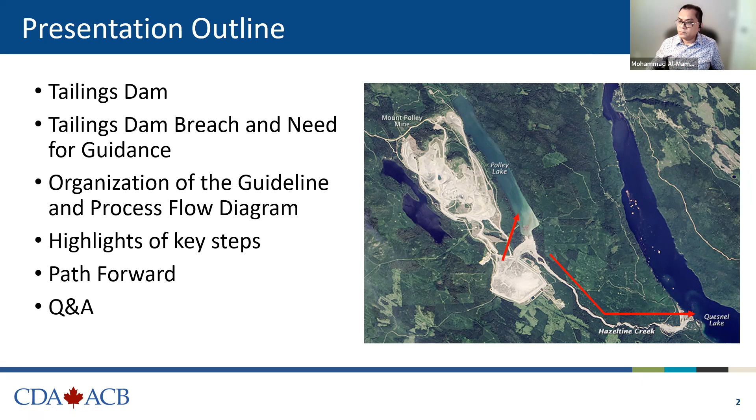So what is a tailings dam? I think most of you are probably familiar with that, but for those who are not quite familiar with this terminology: when you say tailings dam, we mean a containment or barrier structure usually constructed in mining operations to store their mining byproduct, which is tailings.

Basically, we can see the two materials deposited behind this tailings dam are the tailings and the supernatant pond. As you can see on the right side of the slide, there are different ways of constructing these dams, popularly known as the upstream method, centerline method, and downstream method, depending on how they have been constructed. On the side, I'm showing an image of the Fundão tailings dam in Brazil, which I'll reference in some upcoming slides.

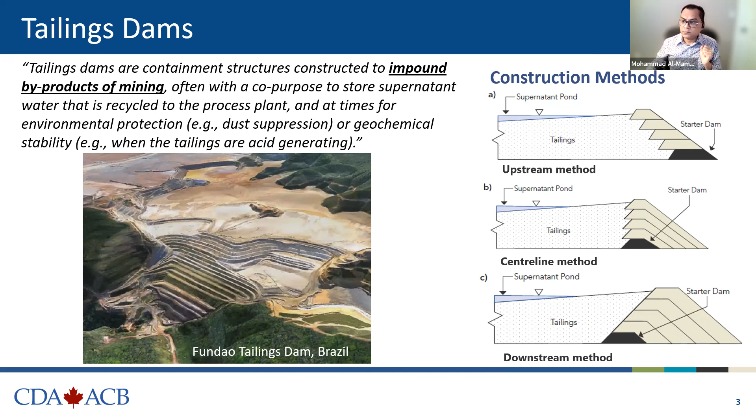So what is the dam breach, and why does tailings dam breach need more attention with respect to the conventional dam breach that we have been familiar with, the water dam.

Once it breaches, you will definitely see the material come out. So as you can see in the side-by-side comparison, tailings dam breach and post-breach characteristics are not similar to the water dam breach, so it does need particular attention.

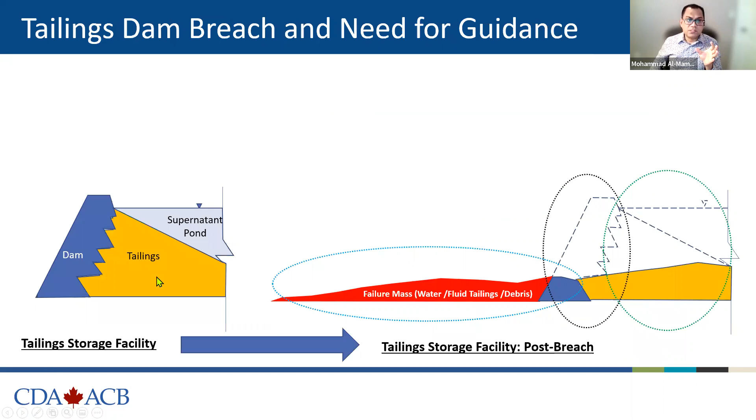So I want to elaborate a little bit more on that. This is a typical tailings storage facility, just another schematic. You have the dam, you have the tailings, and you have the supernatant pond.

Now, in terms of understanding how the tailings dam breach works, I drew these schematics with three circles, and that's how I see this whole thing in terms of doing a dam breach study. The green oval is basically the post-breach, where the tailings was all being retained. The second, the black circle, is the dam—how the breach occurred. And the third part is once the breach occurs, how the material is going to flow downstream.

So unlike a water dam, you will need to understand first the geotechnical characteristics of these tailings, and then the hydrotechnical characteristics in terms of when they are going to flow.

It's a complex process that goes beyond one discipline of engineering. It needs to bring in knowledge from multiple disciplines involved in tailings dam design, construction, and operation. That's the breakdown of how complex this breach could be.

And that's why we need to worry about tailings dam breach, particularly understanding the after-effects, because this is very important for dam consequence classification, emergency planning, and mitigation planning. It's important that we come up with a realistic, acceptable, and reasonable inundation map, so that subsequent work like consequence classification, emergency planning, or mitigation planning can be based on those plans.

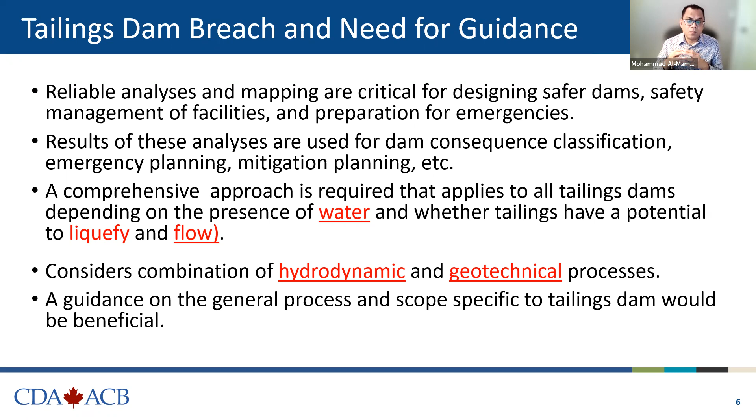With all this understanding, we consider that a process should be developed that considers both hydrodynamic and geotechnical processes. With all these, we started to feel we needed to develop some guidance document. So a little bit of history with respect to how CDA got involved.

Before 2014, there wasn't really much concerted effort to come up with any guidance document. I started my practice in the early 2000s, and at that time we were using water dam based modeling. We started to see the gap and the challenges we were facing, in that those approaches were not adequately capturing the tailings dam breach phenomena.

So in 2014 and 2015, we actually did a series of workshops. The first workshop in 2014 was a state of practice workshop. We invited people from Canada, North America, and also internationally to share their knowledge - how they are doing things, what kind of approaches they're using, what kind of challenges they're having. That was a day and a half workshop, very successful, attended by a lot of interested parties.

That was followed by another workshop where we wanted to see how we can coordinate our effort. Following 2015, the Canadian Dam Association Mining Dam Committee mandated a working group to develop a guideline document. That working group worked from 2016 and is still working, I think. By 2020, we had the final draft. In between 2017 and 2019, we had a couple of workshops where we gathered input from interested parties. Finally, late last year, the bulletin came to light. So this is how it looks, the cover, and it's now available on the CDA website and available for purchase.

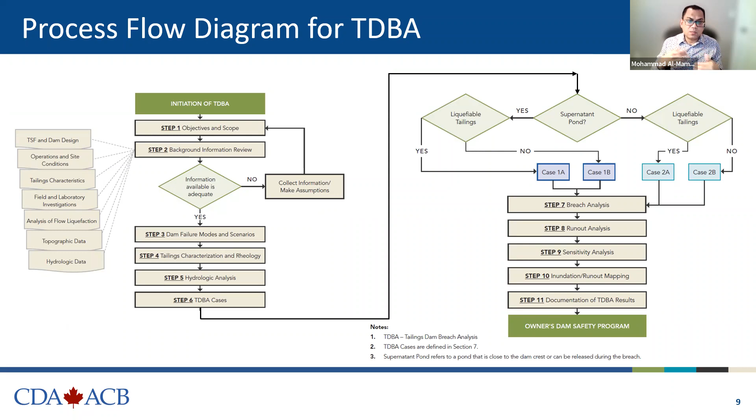So beyond that, I think I will move into some of my slides. I think I'm going to talk about that.

So in terms of the study scope, a little bit more on that. Now, we know that, as I said, sometimes you may not need a very detailed study in terms of the breach analysis and inundation mapping or that kind of stuff, but you just need to understand the preliminary picture of what's going to happen if the dam fails.

So you may be able to do a desktop study, but you can still follow that framework up to the level where you think you don't need to go into further details. And then, of course, you can do the detailed study.

The other relevant question we get from time to time is the validity period of the TDBA, right? So we know that the tailings facility usually has its own life cycle. If it transitions from one stage, let's say construction, operation, to the closure and post-closure, there will be material change on the facility.

So you need to update your inundation study. And the other time you have to do it is if there are major changes, right? If there is a major change in the downstream, there is a new building or new settlement, then you need to revisit your existing inundation study, or there are changes to the design of the facility.

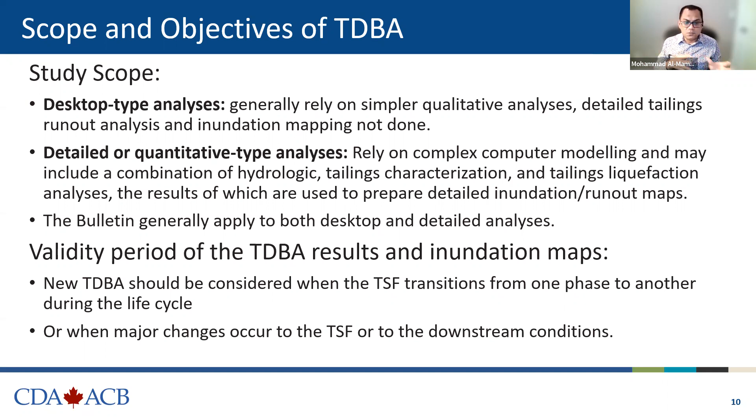You raise it by another 10 meters that wasn't anticipated. So it's just common sense, right? We are trying to use this study to capture the downstream consequence, or the downstream impact. So if something happens either downstream or upstream, then you need to revisit your study and capture that.

Now, the failure modes and dam failure scenarios. This is very important for the tailings dam, and there have been multiple guidelines and best practice documents published recently. So there is ongoing discussion around clarity of what should be explored in the tailings failure modes, or critical failure mode, and so on and so forth.

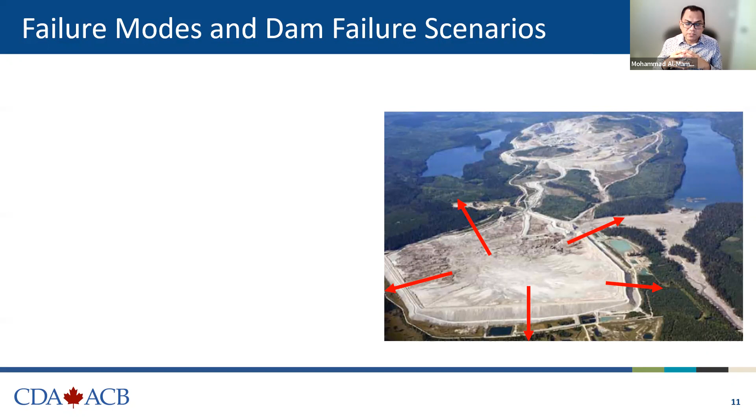So what's important to understand from the dam breach perspective is that you cannot just pick and choose one failure location and failure mode and go from there by presumption, right? So what we advocate in this bulletin is that you have to have a physically sensible and realistic failure scenario and failure modes that you are going to use, not a failure mode that you think has very remote possibility of occurring.

So we use the words critical and credible failure mechanism, but don't get too hung up on the word credible failure mechanism, because we know there are different thoughts about the actual definition. But without getting into that, what we are saying is it has to be physically sensible and realistic, so that the prevailing failure mechanism or the failure modes, collapse or overtopping, the way the dam usually fails, can be related.

Now, all relevant TSF stages, including construction, operation, and closure. I think it just ties with what I said, that if you are dealing with a facility going through different phases, then you need to put that into perspective as well.

And the other part of this is that this is just another snapshot of the Mount Polley facility. It's in British Columbia. So you can see that it's a ring dike. It's an external tailings facility.

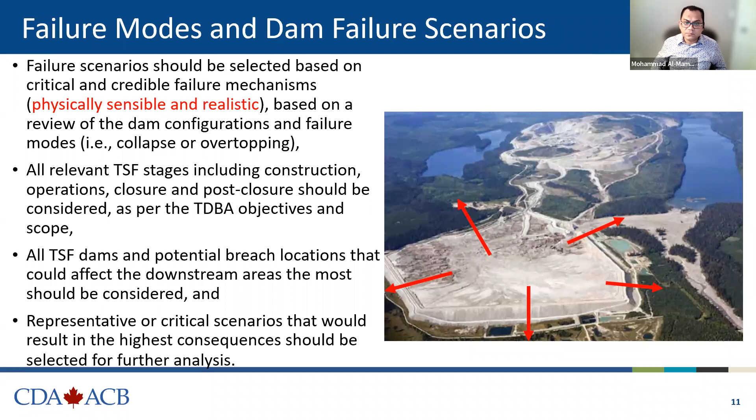Before I move further, I wanted to add a bit about tailings characteristics, the composition and characteristics to evaluate whether tailings is susceptible to flow liquefaction. We talked about CPT and other in situ and laboratory testing, but the main point is that you have to understand how your tailings is going to behave if the tailings dam is no longer there. Is it going to stay there as a solid mass, or is it going to run out as a fluid material?

So how do you do that? There are ways in the geotechnical investigation and understanding process. I just put in a CPT trace. That's one way, it gives you the particle profile, and you can develop your general understanding of the tailings across the facility.

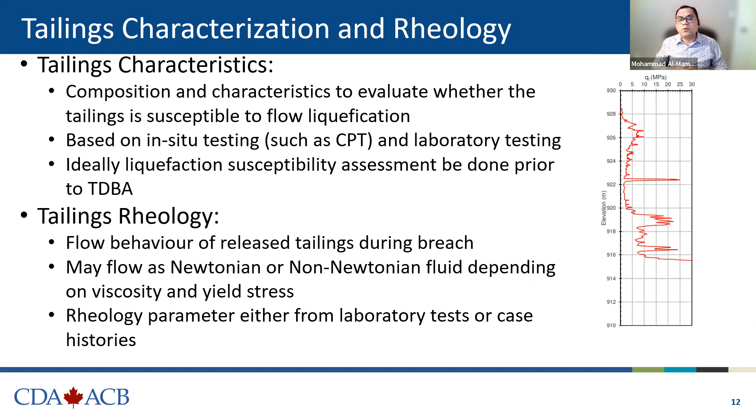The other term I'm throwing here is tailings rheology, because as I've shown in my previous sketches, there are three bubbles: your facility, your dam, and your downstream. When the tailings started to flow downstream, how it's going to flow, the flow behavior will depend on the rheology of the tailings. So that's some information we also need available for this study.

If you remember the flow chart we had, this is one of the central parts of the process. What we are saying is that if you have a tailings facility, just look at it the way it is right now, and say whether it is holding water, or it can hold water in the event of a big rainfall. It's not very difficult, you don't really need to do a lot of study. If you have a general topography and look at it visually, you can get your head around that. So the big point is that water is close to the dam, right?

If you have a large tailings facility and it is holding some water far away from the dam, then it may not be that critical. So when we say supernatant pond, we are referring to something similar to what you've shown in the sketch, close to the dam and available to come out in case of a breach. So do you have that? That's your first logical question to ask.

The second piece is a little bit loaded. Now you need to say, okay, is my tailings liquefiable? It's not an easy question to answer, especially for facilities that haven't gone through a lot of rigorous investigation. But without knowing that, or at least having some understanding of it, you won't be able to do a proper inundation study, or whichever type of study you do, it's not going to be complete without understanding if that material is going to come out or not.

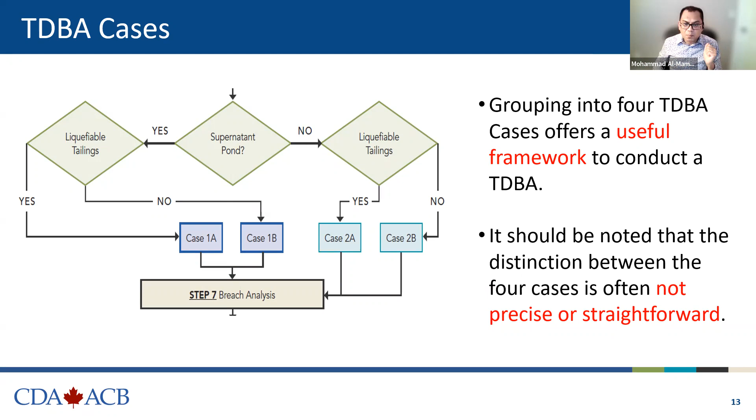Bear in mind that this is just giving you a framework to articulate your thought process, before you jump into very detailed analysis. For a given dam, you may have to use your judgment and understanding, and explore a bit more to use this framework. It's not going to be like every dam is covered, it's not precise or straightforward, but at least it is something that will give you a starting point.

Now, another representation of the same process, we fondly call our 2x2 matrix. It actually has a 2x2 form. So take this: is my tailings liquefiable? Is there a supernatant pond? Pay attention to the words we mentioned. We didn't just say supernatant pond - we said supernatant pond present or pond release possible during breach. That's the important part. Is release possible during the breach? If it does, then that's what we meant. And then whether your tailings is liquefiable, decide.

So you can see that case 1A, you have liquefiable tailings with supernatant pond, and then the same scenario without pond in case 2A to B.

Now, the other point I wanted to emphasize is that those of you familiar with tailings are probably familiar with the term liquefaction. Here we are particularly interested in flow liquefaction that could be induced by any trigger - static, cyclic, or seismic, including lateral unloading. So what we mean is that if you have liquefaction, not necessarily liquefiable tailings fitting into 1A, what you need to understand and confirm is this flow liquefaction. In other words, if this containment, this trapezoid holding the tailings, for some reason if a portion of this is gone, would this material come out as a flowable material?

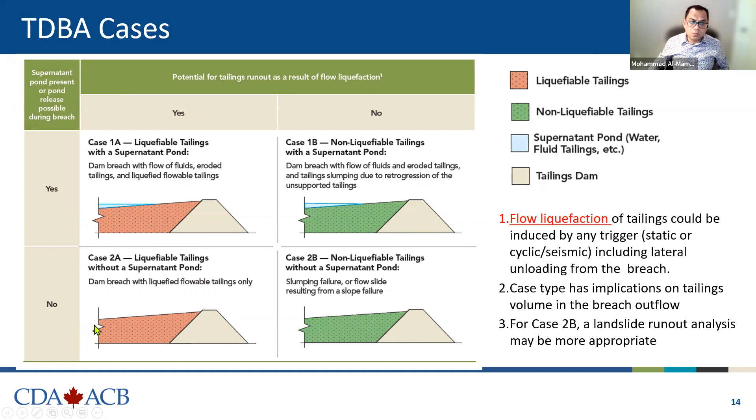That's kind of the main point. If that happens, then I think you need to consider that as case 1A or 2A. So as I said, these things are not quite straightforward. There will be some judgment and understanding that needs to be considered.

So what are those? For example, if you have a facility that has been closed and there is no water, in a sunny day failure or normal case, you don't have any extra water. But if that same thing fails during a hydrologic flooding event, then it will become like a water holding facility - your 2A may become 1A. Likewise, if you have non-liquefiable tailings and no water, but there's a space within the crest of the facility that can hold water, and that causes failure, then you have to consider it as case 1B, just as an example.

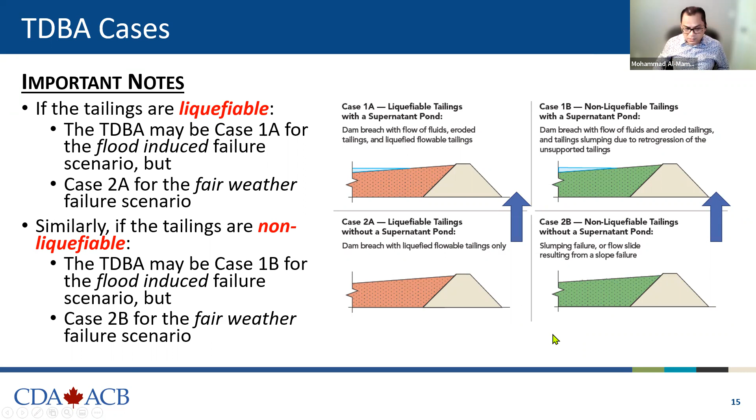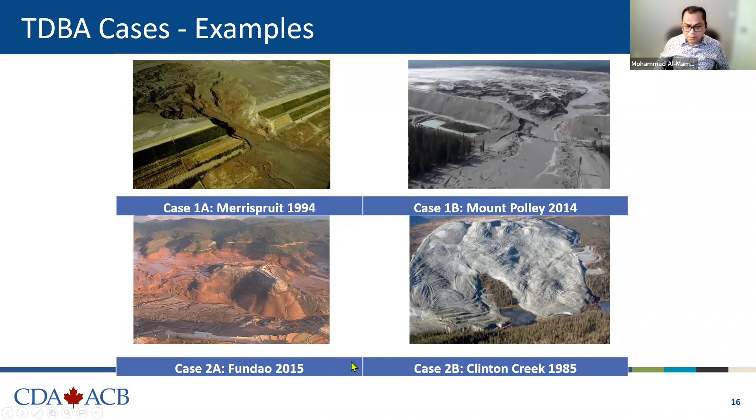So then we also looked into some case histories - did we test this 2x2 matrix or framework? Here's an example. We looked into case histories, like some recent failures and also some historic failures. You can see there are examples. I'm not going to go into too much detail about that right now.

So then now the hard part comes. Once you go over your facility, understand your tailings, come up with your 2x2 matrix and your mechanism, now you need to do the actual breach analysis and modeling and so on. So you have to understand three parts - these three bubbles. The reason I'm saying overlapping is they're not standalone because they are all dependent on each other.

So breach analysis is basically understanding the physical process of tailings breach for a given facility and case, and then calculating how much volume is expected to come out, and understanding how the dam itself is going to breach in that process. Once those two happen, then you've got a big mass. The third part is that you model the breach extent downstream. So those are basically the three parts.

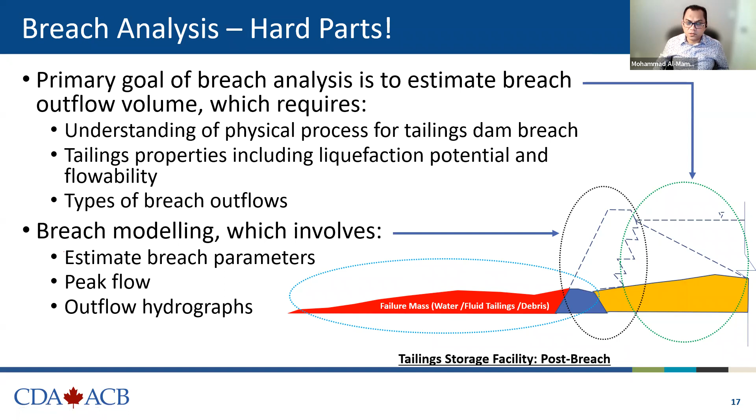There is lots of detail in terms of these three steps. And as I said, it's an evolving science. So we were cognizant of that when we developed this bulletin. But here I'm going to touch on some aspects of it - the intent is not to really go into the details of any of those.

So the physical process of tailings dam breach is how the breach will actually unfold. If you are in case 1A, 1B, you'll have erosional breaches because you have the supernatant pond - it will erode tailings when being released. That's one part of your flow. And then if you have a liquefiable material, that will come out too. So that's case 1A, 1B - a general understanding of the process of breaching.

But then if you have case 2A, which doesn't have water, it's just that if the dam fails, it's just the liquefiable tailings, if there is liquefiable material. But if you look into case 2B, there is no liquefiable material - that means it's not going to flow. There is no water, so there will only be slumping or a slide, because there is no water. So that gives you a sense of how the breach will unfold.

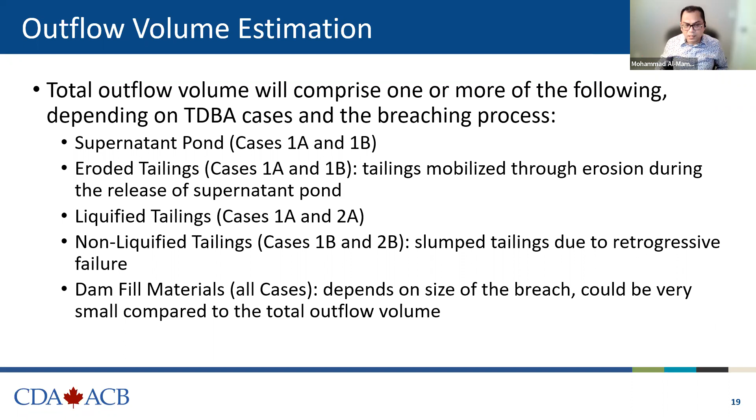And then depending on how wide and how big the dam is, your dam fill material will also come out. Now, if the dam is holding a lot of material, a big pond and everything, which you see in many tailings facilities, then this material will be very, very small compared to the total amount of the outflow volume. But give or take, these are the elements that you need to calculate and understand how much is going to happen.

So this is one example of how we think we should look into the outflow volume calculation for Case 1A, where you have a supernatant pond, and then you lost your dam, let's say, and then your material will start to unfold, and eventually it will be released, and then you will end up with a backscarp. And in terms of the plan view, if it is a ring dike, then you will be seeing a failure scar here, like what you have seen in the Merriespruit case.

So that's kind of the idea. And we talked about how you can use a simplified approach or a more detailed approach to calculate that.

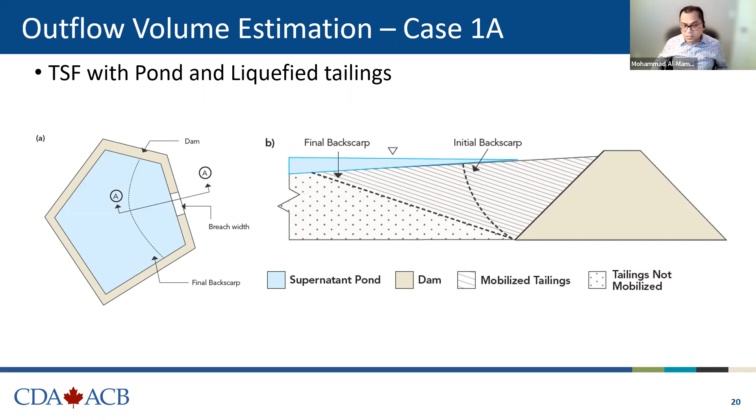So the second part is my second bubble, the black part, the breach formation. Now that's a challenging element in a sense that even the breach formation of a water dam with an earth embankment is also not completely understood. Some of my hydrotechnical friends may or may not agree to that, but I think that's one observation by the working group, because we know there is some established science on how to do the overtopping or piping type breach modeling, but they are not readily usable for the tailings dam.

For the erosional type failure, you can use them with some modification, but where you have a liquefaction trigger, it would be difficult. So there are some discussions around that, and it's an evolving science. So you will have to go above and beyond in some cases if you wanted to fully capture that, and then you have to see the relevance of this with respect to the overall study.

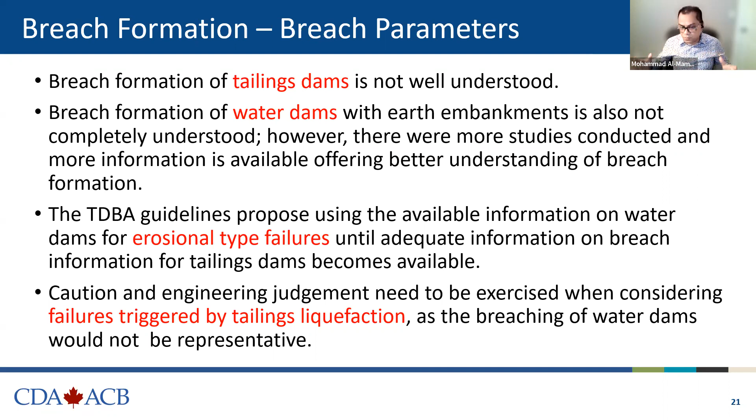And then the next step is the breach outflow. Now, there are more than one ways to capture that. I think what we adopted in the bulletin is the solid concentration, because what is going to come out, my third bubble, the downstream, is going to be a mixture of water and solid. So one easier way is to see actually how much solid content you have in this, because there's a lot of study done on that. So we can use some of that knowledge, and you can have a water flow, mud flow, and flow slide, and then you can have a slumping.

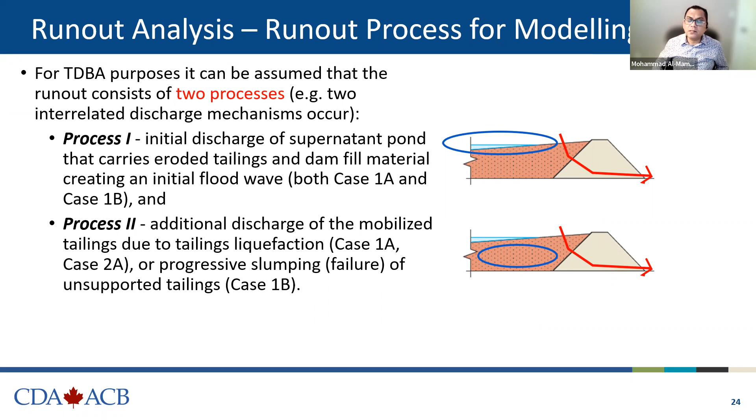So what we are suggesting is that you assume this as a two-process flow, and use that to do your runout. You may have to combine these processes and do your runout model, but it will depend on the facility, so things get a bit more complicated. There is no one way of doing that.

There's also some guidance around material in the flow runout process and flow type for each case, so you have an understanding of what material is in the flow, and how many processes you are expecting.

If it's case 1A, both processes occur, and in case 1B, both processes occur. But in case 2A, because you don't have available water to initiate the process, it's basically that you lose the dam and the material behind comes out—so it's process 2: a mud flow, flow slide, slumping failure, or flow slide.

You'll see we're using heavily loaded terms like Newtonian, non-Newtonian—these are more hydrotechnical terms characterizing the outflow, which will dictate what kind of modeling you'll be doing. There's some additional guidance on that in the bulletin, so I won't go into too much detail.

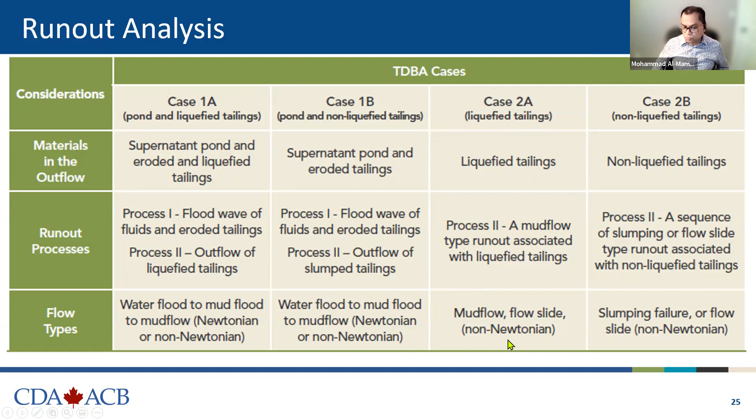The last few slides cover additional requirements to look at. This process is so complex and difficult to get an accurate estimate of many parameters and processes—there will be lots of uncertainty, starting with failure mode, volume of mobilized tailings, interaction between fluids and tailings, properties of the material in the breach outflow, and erosion of the dam rate. There's a list of items that could pose uncertainty.

Even after you get your head around that, you'll have to do almost a parametric study. For example, how long breach development will take, how the side slope will behave—like the conventional way of doing an inundation study. Those kinds of steps are also prevalent for tailings dams and need to be looked at.

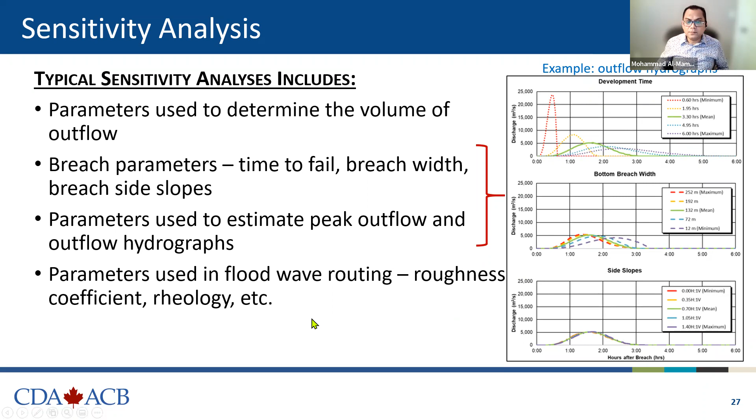That's all about the study. Now, after you do the study, what do you do with it? The main purpose is emergency preparedness planning, dam failure consequence hazard risk management, or environmental impact assessment.

The map content, we talked about that as well. What kind of information you need to provide into the map: flood extent, frontal and peak flow depths, and all sorts of flood information.

This is a simple example of the Merriespruit case. On the left side is showing the surveyed failure, like this tailings pond, and that's where it breached, and this is downstream. This is being modeled, so you can see there is a similarity between these outflows. That's kind of the intent of this sort of study.

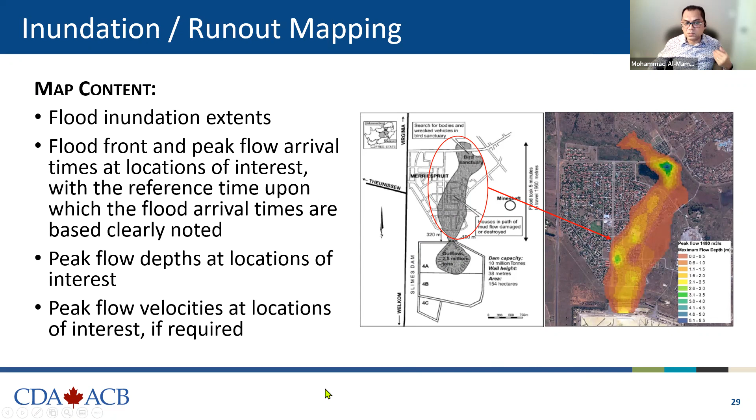So before this happens, you can study and understand the flood information, so that you can use that information for your subsequent emergency planning, impact assessment, or subsequent studies.

And then I think there are other ways of providing this information in a meaningful way. I wouldn't go too much into that, but we can talk about that.

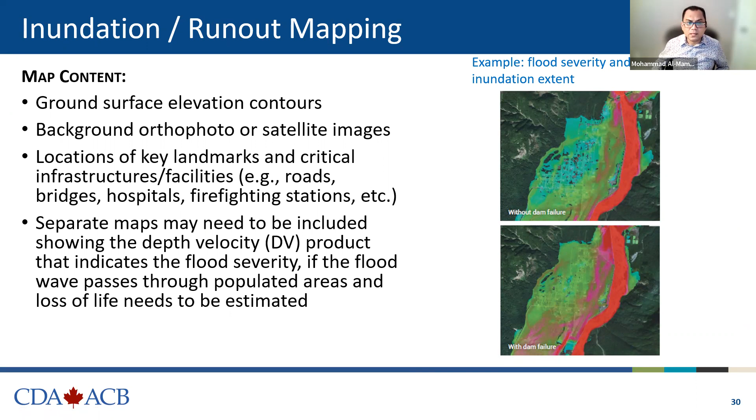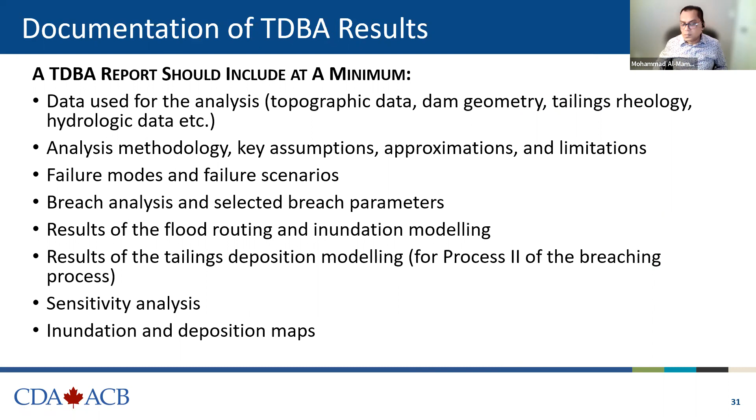And finally, what do you need in the report? I think once you do all this work, you have to prepare a report, and we provide some guidance on what such a report should include.

All right, so path forward. We published the English version, and the French version is done. I think the last bit is going to the publisher in a week or two, so the French version will be available probably within a month or two. And we've also started the Spanish version translation of this document.

We know there is some demand from the Spanish-speaking people in South America, so we'll be preparing a Spanish version. There's no timeline yet, but it's being sanctioned.

Finally, the working group has also started working on a training course, because now we have the bulletin and we want to develop a training course so that we can clarify and elaborate on some of these items with more typical examples or case studies, and that way help practitioners become more trained to do this type of study.

I also want to mention that if you guys wanted additional resources, there is one recent paper by Nahian et al. I think they used the same framework and looked into a lot of case studies, and you can see some use of that.

I also came across this other paper, Hussein et al. in 2020. They also talked extensively about dam breach and make reference to these approaches.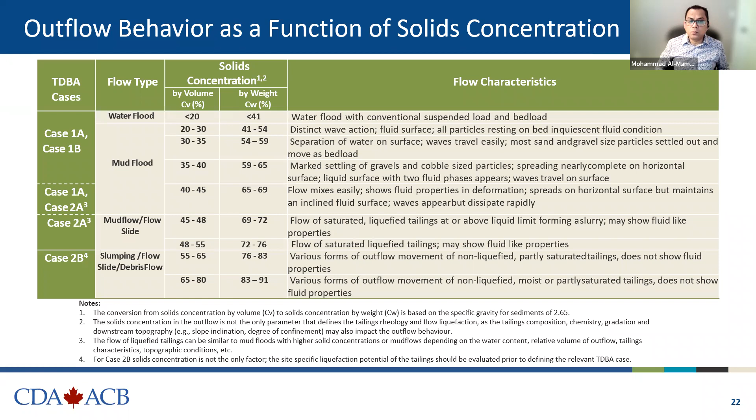There isn't any easy answer to that, because we're not saying that, as I said, that in process 1 and process 2, it's a tool to understand, to give you a tool to estimate your total outflow volume. Now once you do those processes and separate that, and you come up with your total volume, then I think you shouldn't be hung up on process 1, process 2, or types of flow.

Then you need to see that, because in reality, all this material will be mixed up and come out, right? It's not that, unless there is a geometric constraint within the downstream or within the tailings facility. Based on case history, we know that as soon as the dam fails, your containment is gone, everything will come out, right? So this is my opinion, but my working group members may or may not agree, and that's kind of the beauty of this thing.

Then you will likely have to look into the overall solid content of your material, and then you have to likely model it as one phase flow. So that could be one way to look at it.

There was another comment, I think it's a comment from Mauro Jr, answering questions to Natalia. I think in these scenarios involving the failure of the stockpile, you would probably need to estimate the volume using a 3D stability analysis of the pile and use that information on the dam break.

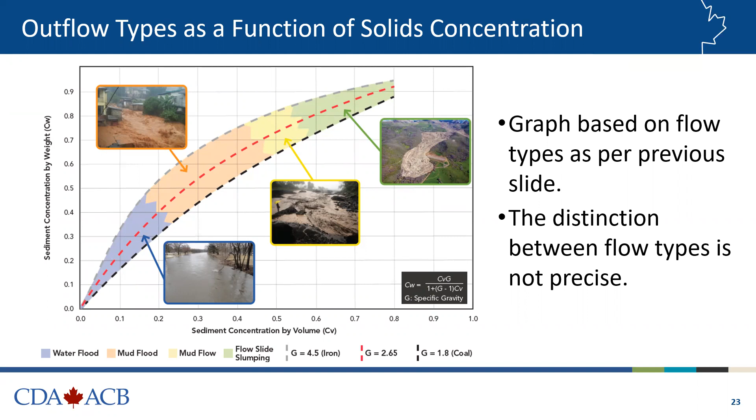I understand the principles of all that you articulated, but I might just point out some of the challenges of trying to predict the size of how the failure will occur. And if you look at Mount Polley, you pointed out that's a ring dike, right? There was a lot of dike there. But the failure that occurred, the breach, was only about 200 meters.

That's right. And as you well know, it was a slump, and then it was overtopped, and then the pond released, and then the tailings eroded out. The erosion opened up the breach, right? So there was a long lag, if you like, time for that failure to occur.

It was very complex. The other thing I'll say about Polley is, how do you decide on the risk when nobody seems to think about the length of the embankment, the berm? It's several kilometers there, and you can't see where it's going to fail and how much will fail, compared to, for example, Feijão, where the whole dam released in 10 seconds. So some of these things are so complex, even just trying to decide how might the breach develop and where it might be. Then if you can get that, you can do the model. But some of these are so complex, though I know you appreciate that.

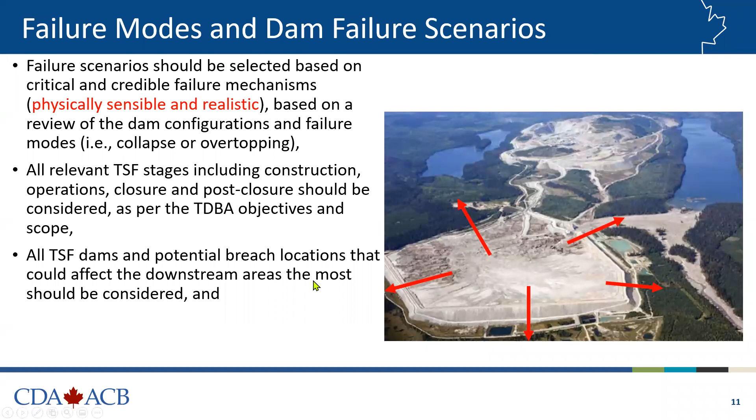Just while I'm here, Natalia asked you a very good question. Her whole thesis—she did her master's on the flow from Fundão—and now she's up here doing her PhD, so she's very interested in what you're presenting. Thank you. Yeah, that's good. Thank you.

I like to tell people you can think of it like three bubbles. Each bubble has its own challenge. You need to understand what you are holding and how it's going to unfold. Then you need to understand where it's going to fail, and if it fails, how it's going to fail. Once you figure that out, then you have to look into that. I can't separate them into three separate processes—the whole thing needs to be looked at together, and that's why I think it's the biggest challenge.